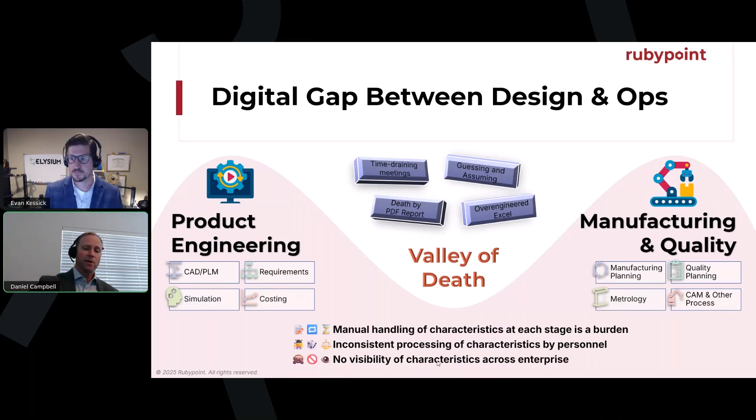And then another big problem, especially as we enter the digital age, is that there is no visibility to these characteristics, to those annotations on your drawing or your part, across the enterprise. It's sort of a visual artifact that gets consumed by a human engineer at different points of your enterprise. So this is the problem that model-based definition is trying to solve. And so that's why we talk about digital thread, model-based definition, characteristics. This is why people are starting to really talk a lot about characteristics, because people are realizing that really is the essence of the data that we're trying to track.

So to take a step back, what is the digital thread? It's a term that's thrown around. The core of the idea is that we have very, very good point technologies in narrow domains. There are very good software packages that do various things in each of these domains. The digital thread is about trying to connect all of these solutions so that they can talk to each other, so they can benefit from each other's knowledge. And that means across domains, from engineering through manufacturing through quality.

So what's the enabling technology for us to get there? Digital thread is just a high-level idea. You don't implement the digital thread exactly. So what are the technologies that you have to implement to get there? So MBD, that's really what we're talking about. We want model-based definitions so that we can have some semantic structure around our annotations, so it's not just a visual decoration for a human being to consume. So certainly semantic or machine-readable model-based definition.

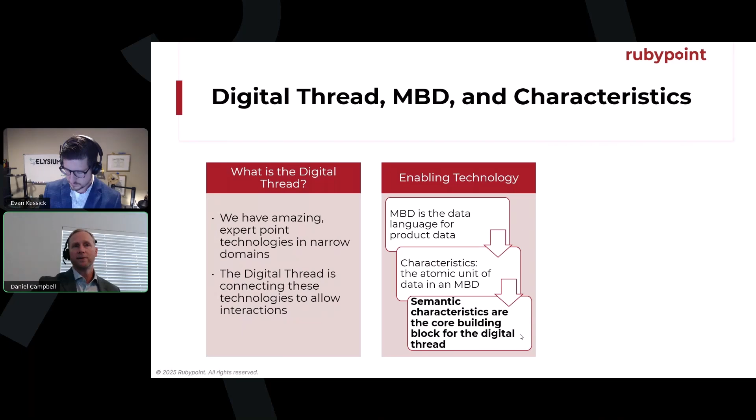So now we know what technologies we need to start taking seriously in order to implement this digital thread concept. And so how do we do that? The key is understanding that there are actually good technologies and good standards out there that allow us to implement these techniques. So don't think about this in the abstract. Look at use cases in your own enterprise where you consume characteristics, and think about how you can use the tools and standards out there to accomplish what you're looking for.

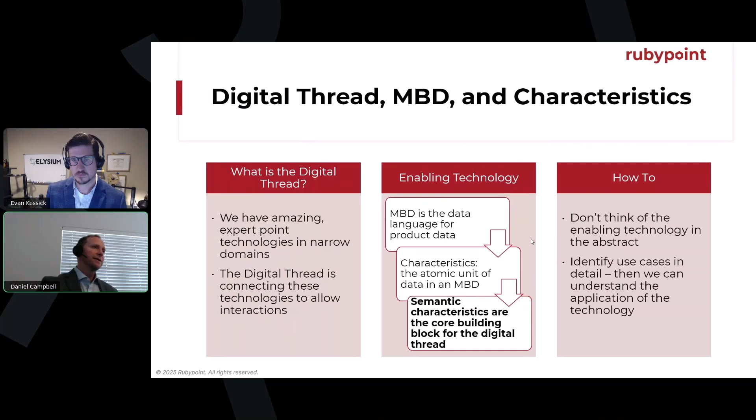That's a little bit of background on characteristics. I think it's a very important concept for people to really grab onto, which is why it's timely that the DMSC has released this standard, the first standard in this area, on model-based characteristics. What this standard accomplishes is it gives manufacturing enterprises a way of thinking about how to track characteristics, putting IDs on characteristics so they can be tracked across your enterprise, and, in addition to the characteristic itself, what additional metadata might be attached to the characteristic that should be tracked.

Basically what it does is it provides the framework where characteristics can start to be thought of as business objects across your enterprise. Something that could fit into a business software context, just like you might think right now about parts in terms of how you look at parts within the context of your PLM system.

And I think one thing to point out is that what this model-based characteristics standard is really meant to address is the idea of model-based definition, 3D annotated models. But actually the principles that are discussed here are applicable to traditional 2D drawings as well, if you want to start thinking about characteristics on 2D drawings in this way.

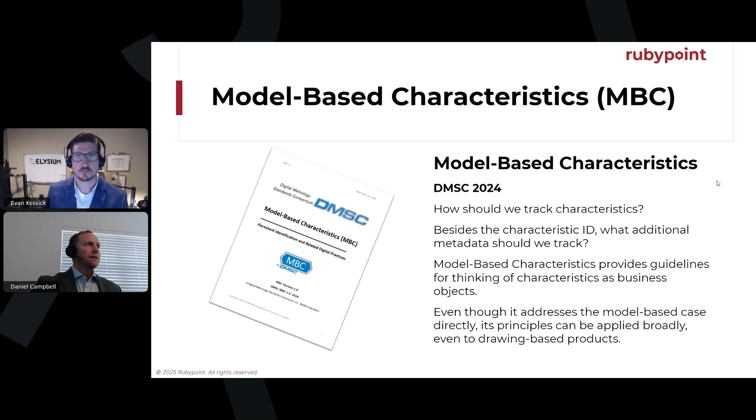So what I'm going to do is give a little bit of background about what the model-based characteristic standard is, and then give you the resources so you can go and download it yourself and check it out. So what we're talking about is this idea of these characteristic tags, these characteristic IDs. Sometimes they're known as balloons. Traditionally they're known as balloons because you take a piece of paper and actually start marking it up with a pen, 763, 764, 765, etc.

But what we're establishing is a framework by which we can start to identify what these characteristics are, how they get tagged, how they are discussed from one software to another. And so that's really one of the core ideas, the way that characteristic IDs are assigned. But then we get into different augmentations that could be added to the characteristics as well, and establishing a framework by which you could start to apply this extra bit of metadata.

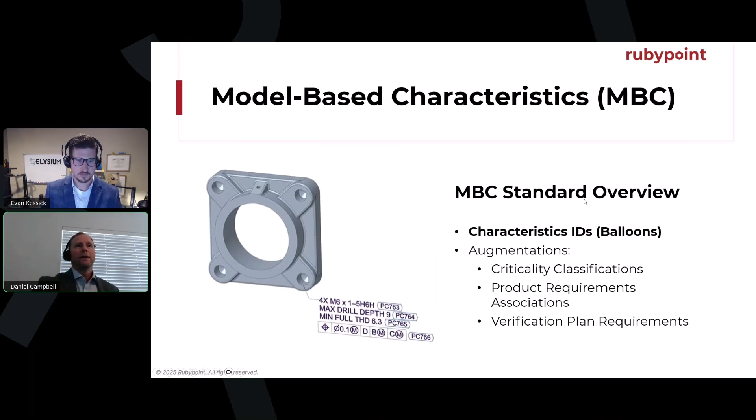And so, like I said, the core thing is this balloon, and this is called the product characteristic tag in this case. It has this PC prefix, which is optional, but it stands for product characteristic. And this is the core ID for tracking this characteristic. This might be a human readable characteristic, 41. That ID should be unique within the part. I think that's obviously very important.

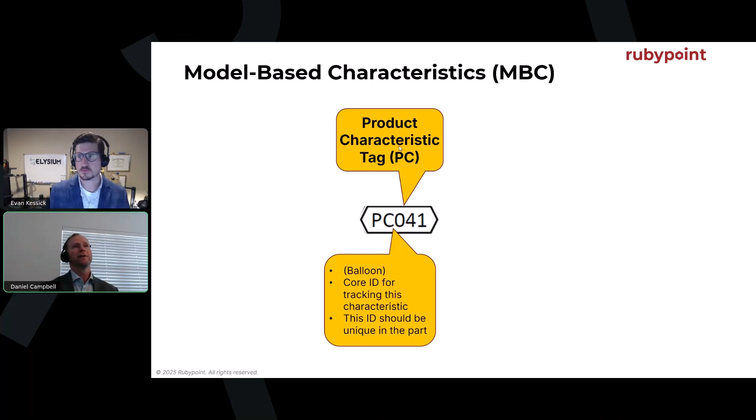Also, the standard does discuss the idea of the use of machine readable IDs. You may have heard of UUIDs, which is a very robust standard for generating unique IDs that can be assigned to a piece of data in software. So there's a framework for mapping UUIDs behind the product characteristic tag as well. But that's kind of the core element that keeps this entire characteristic tag together.

Next, we have the product requirement association. And so really what this is doing is tying together the product requirement that was the source of this particular annotation. So maybe this annotation is a size tolerance on a hole, and that exists because there's some critical design aspect of this part where that diameter needs to be controlled for the function of the part. That might be annotated somewhere in a requirement system.

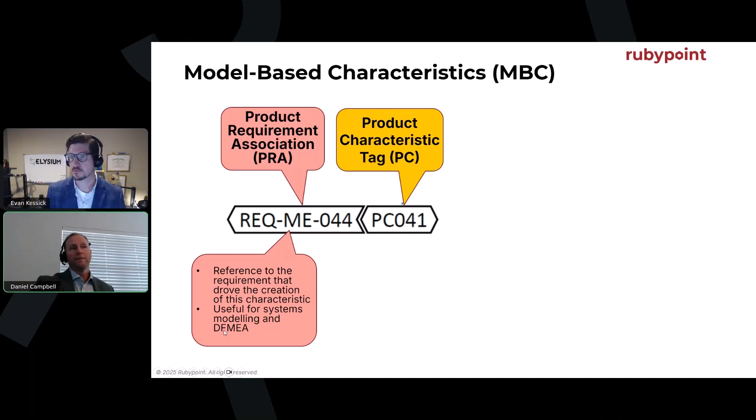This allows us to establish that link between the characteristic on a model-based definition and the system requirement that originally drove that characteristic. This could be useful, for example, for design FMEA analysis. It could be a very useful piece of data.

Next, we have this idea of criticalities. Generally you might see this as something that's high criticality or medium criticality or low criticality. This is a piece of extra data on top of a characteristic that could be added. There are a few different types. There are levels, like I said, high, medium, low, where it's an ordered set and you choose one.

There's also category, where it's an unordered set and you can choose one or more; maybe you could say this is for safety and for regulatory compliance, for example. And then additionally, there's this caveat, which is just free-form text that allows product definition to specify a little bit of extra information related to the criticality.

The final piece of metadata that could be attached is this verification plan requirement, which provides a method where we can say a little bit about the way that this particular characteristic should be inspected. That means, for example, you could specify a method like CMM or caliper, but also the context. You can specify, well, in FAI, we're going to inspect it with CMM, but once we go into production, we're going to use some other method.

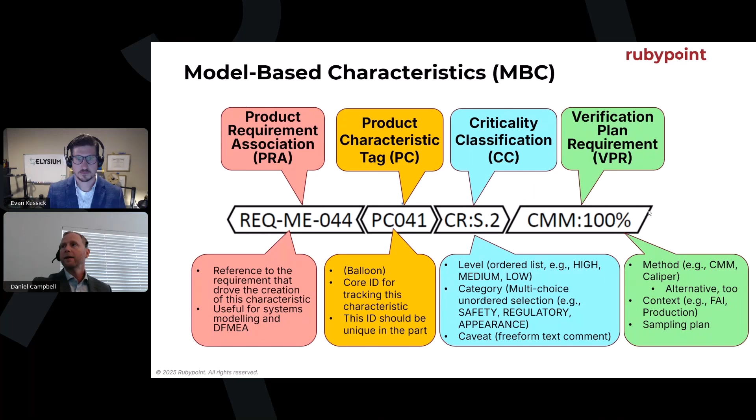The next standard area I want to talk about just briefly, especially in regard to how it ties to making the ideas in MBC a reality, is QIF, which is another DMSC standard. Again, you could find QIF version 3. You could download it from the website.

So QIF, this is a scene I think that many people have seen. These are the different application areas of QIF. At the core, we have the library, but then there's an application area for model-based definition, for plans like inspection plans, measurement resources, the ability to characterize what your measurement resources are, rules for establishing maybe best practices or templates that you might want to apply.

DMIS is not part of QIF, but it's very much harmonized with QIF. It's also governed by the DMSC, so it's included here. QIF results for collecting inspection data, and then QIF statistics for specifying statistical methods for analysis of the data and so forth. But at the core, again, we have this library.

This is really important from a model-based characteristics perspective for two reasons. That's features and characteristics. So this is a core part. If you want to understand what QIF's about, you should understand the way that it thinks of features and characteristics. That is at the heart of QIF. So what is a feature? A feature is a way of abstracting some portion of geometry, really for any particular reason that you might have.

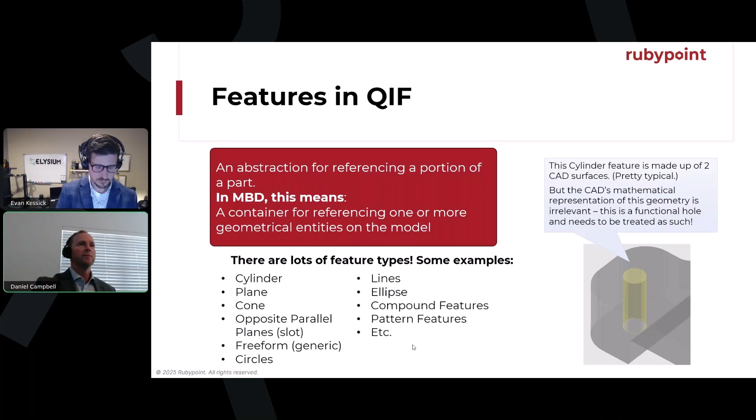And then the next idea is this characteristic. So this is how this idea of model-based characteristics is implemented in QIF. Again, there's a rich taxonomy of different types of characteristics in QIF. They might be tolerance, sort of GD&T related, maybe it's surface finish, welds, user-defined characteristics. And the core idea is that a characteristic on a part points to a feature, and then a feature points to its underlying CAD surfaces.

This right here is the essence of how QIF is architected from an MBD perspective. And this right here also is the essence of how model-based characteristics should be instantiated, and how the ideas of model-based characteristics are being instantiated, with this core concept right here. So that's a little bit of background about the general ideas of model-based characteristics and how they can be implemented in QIF. And Evan now is going to talk a little bit about some of the real application-specific areas and how these workflows look.

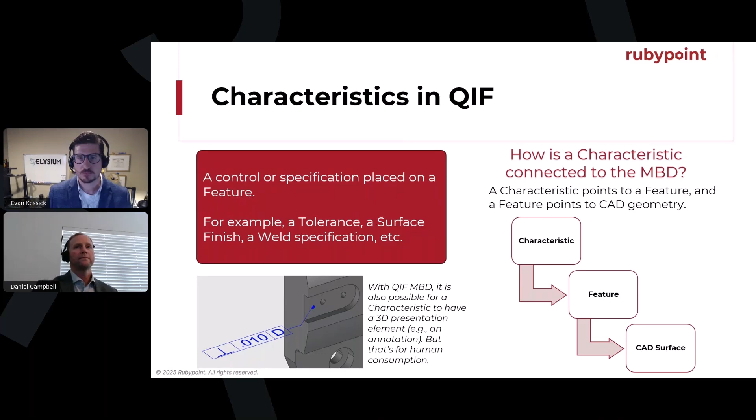Perfect. Thanks, Daniel. Let's see here. Share my screen. All right, you able to see my screen?

Okay. So next, we're going to talk about the enterprise. So Daniel did a great job of talking about model-based characteristics, QIF, and kind of some of the gaps that we have within the industry today. And we're going to walk a workflow. But before we get there, I want to talk about a couple of things, and that is enterprise technical data exchange that's occurring today within your enterprise.

And this is a look at a contrived model-based enterprise. It's made up of various different domains that represent lifecycle activities from concept to disposal. So we have domains like engineering, and then we have our consumption domains, which are made up of manufacturing, quality, sustainment, and an extended enterprise, which is your supply chain. The goal is using model-based definition within your engineering domain, or you may even be creating in-process models within manufacturing and sharing that downward as well.

The idea is that you want to exchange this data and all of the elements of model-based definition. But now what we're talking about is including and adding model-based characteristics and even all of the augmentations that Daniel was just talking about. So whether this data is being created within your engineering domain within the native CAD, or we're going to talk about where QIF can fit in to accept the data from your engineering domain, your native CAD, or even creating model-based characteristics through a QIF workflow, and then being set up to exchange this data to your downstream domain so you have persistent, traceable data throughout the product's lifecycle.

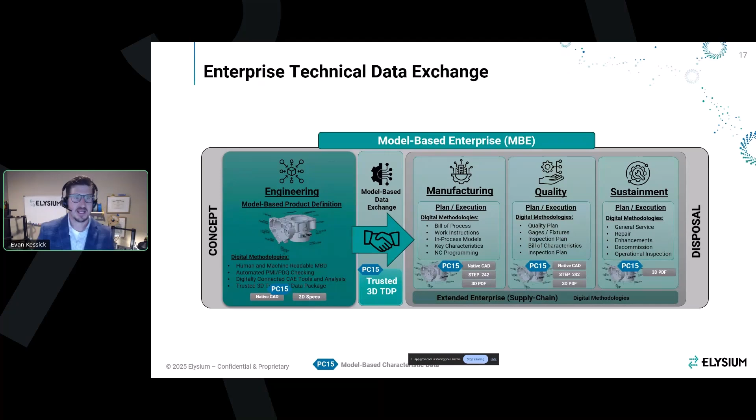Now, when we think about a technical data package, a 3D data package, this is a made-up definition being very closely coupled to standards. I feel that the standards within ASME and even Military Standard 31000 need to adapt. And I think that there's some key attributes that I want to talk about here for a data package, and that is that the data needs to be authorized. It needs to be trusted, validated. It needs to have complete definition across all of your product definition. It needs to be interoperable, traceable, and human readable for all of the consumption workflows within your enterprise.

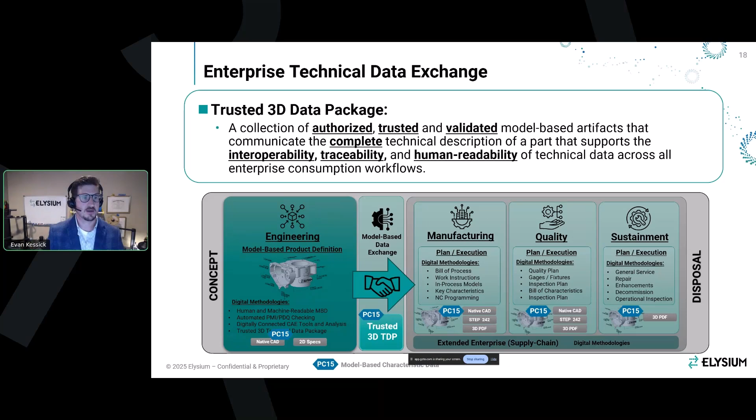And so what does it mean to be human readable, interoperable, trusted, and traceable? I don't want to talk about this in the context of all of model-based definition because that would take a long time. But let's talk about it in the context of model-based characteristics. And Daniel did a great job of teeing this up. We have two model-based characteristics or product characteristic tags. So I have a PC10 and a PC11.

What makes this data human readable? That is the graphical representation that I can see this tag. It's within close proximity to its requirement, my pattern, my feature of size dimension. And I can use my human brain to make that connection that PC tag 10 is associated to this pattern of 4 holes for the size tolerance.

But what about our downstream systems and tools? What makes it machine readable or interoperable? That's where we need some metadata or attribute structure or framework. And this is the gap that the model-based characteristics 1.0 standard is filling. Within that standard, it tells us that we need to have some attributes, some metadata that says what is the PC tag. So in this case, my PC tag is going to be PC10. Do I have a UUID? So what is my universally unique ID to make it stand on its own?

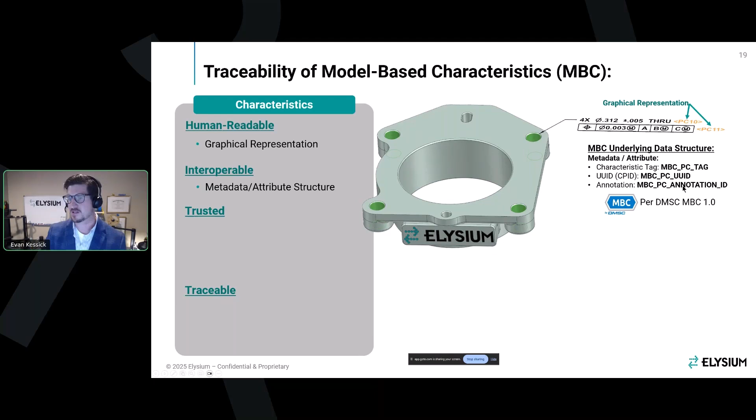I did see a question in the chat, and UUIDs today are an optional thing within the standard, but if you want data traceability and for your characteristic tags to stand on their own within your enterprise or within the universe, you need a UUID. And then what is my product characteristic tag associated to? In this case, it's associated to this annotation, and I would have that annotation named there.

What makes it trusted? It needs to be compliant to industry standards. It needs to be semantically complete. It needs to be universally unique with a UUID, and it needs to be verified through some type of checking process for it to be trusted data. And then data traceability happens as it's being consumed across our enterprise, as it's being consumed and reused within engineering, manufacturing, quality, and supply chain. We're all reusing this same data, the same product characteristic with the same UUID. It's persistent throughout the life cycle.

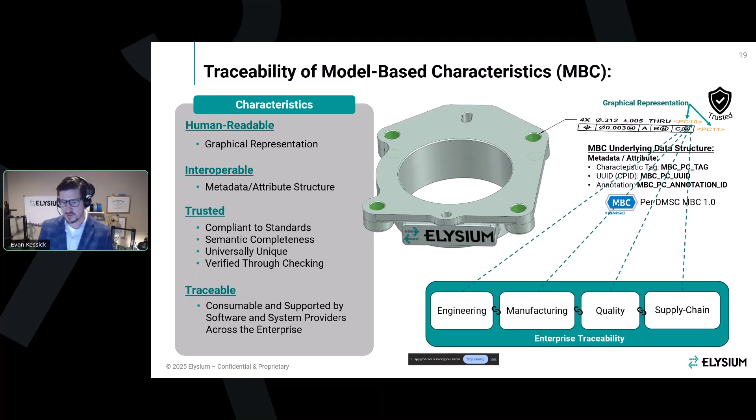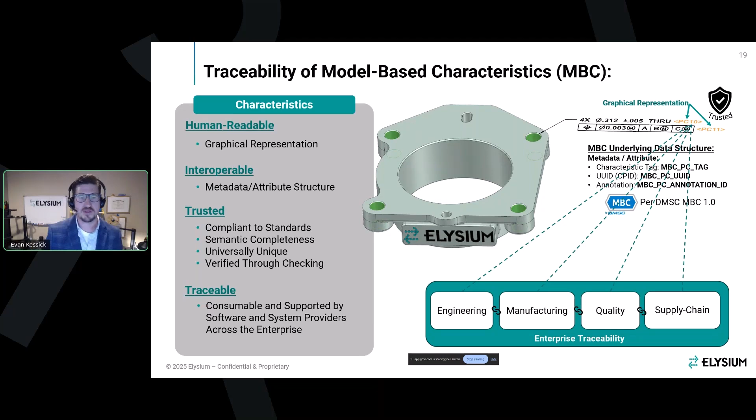And one of the things that Daniel said, which is really good, is that we now have data traceability at the atomic level, which is now at the characteristic level. If you stop to think about that, today we usually have data traceability at the part level, or maybe at a serialized part level. Now it's down to a characteristic within your part, a piece of PMI, and that's great.

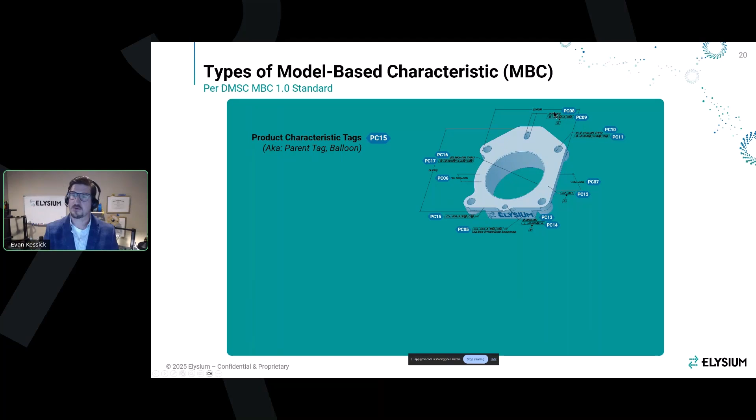There are two different types of model-based characteristics that I want to talk about. The first one is our product characteristic tag. That's the PC15 that you see on the screen here. I also like to call those our parent tags, or many of you call them balloons. And those are being assigned to each requirement or characteristic within our model, or MBD. You could think about this as being assigned to each requirement as it stands on its own, like for a size dimension and position tolerance.

But in some cases, for patterns, we also have a product characteristic instance tag, and these are the child tags or the child balloons, and these are the PC10, and then it has a dot with its instance. So for my pattern of 4 holes, I have 4 instances for both the size dimension and the position tolerance respectively.

All right, and once I've characterized my MBD properly down to the instance, I can now generate a bill of characteristics, which has a lot of great information embedded inside of it. I have all of my product characteristic tags. I have the presentation state that it resides in. I have its requirement as it's stated within my model-based definition. And then I have it broken down by nominal, plus minus tolerance, and even my datum reference frame if I wanted to filter or sort by the various different setups that I may have.

The nice thing about a bill of characteristics view is that A, it's characterized, and you can see a lot of your requirements all at once. And I think one of the hurdles that individuals face when transitioning from drawing-centric workflows to model-based is that you only get to see one presentation state at a time. In a 2D drawing, you may be able to see multiple views at a time. But in a bill of characteristics table, you get to see a lot of information across the entire table.

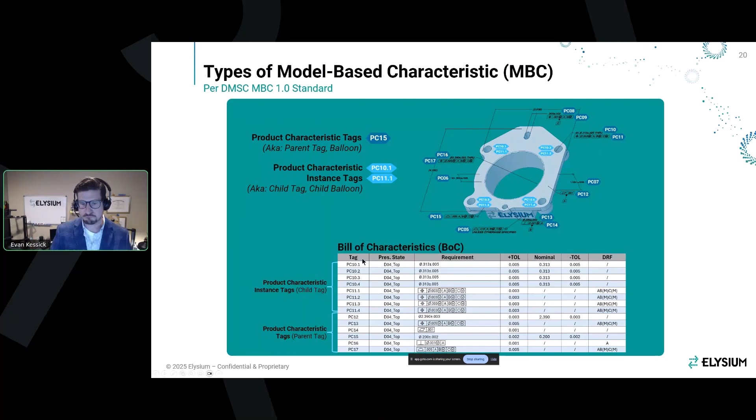So traditionally, right, in a drawing-based workflow, how are characteristics assigned? Where are they created? In a drawing-centric or drawing-based workflow, engineering creates a 2D drawing. That's usually accompanied by a 3D model. And as that data gets released, some data may be exchanged into a PLM, but quality is going to manually balloon or characterize this 2D drawing. Keyword is manually. And then once it's characterized, they'll manually generate a bill of characteristics, whether they manually transcribe that into an Excel spreadsheet or into some database downstream to perform lifecycle work activities.

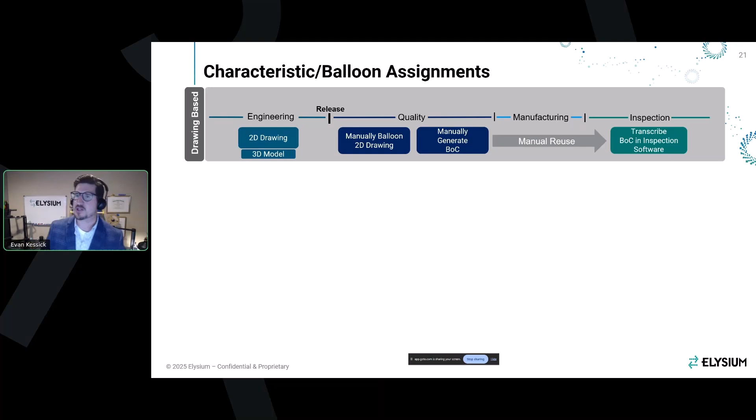Manufacturing will manually reuse this, and then inspection, it gets manually transcribed into their inspection software. So if you think about where characteristics are actually being assigned, it's by a human in the quality domain downstream, out past release, which is very error prone and time consuming. In some cases, an alternate option would be that those characteristics are being assigned within the inspection domain.

If we look at a model-based workflow, I have two of them that I want to show you, where today we want to characterize our data within engineering. And I put partial characteristics here because there are some shortcomings and hurdles with the current state of tools to characterize our product definition within our native CAD. And then complete characterization is happening within this enterprise data workflow that we'll talk about here in a few minutes.

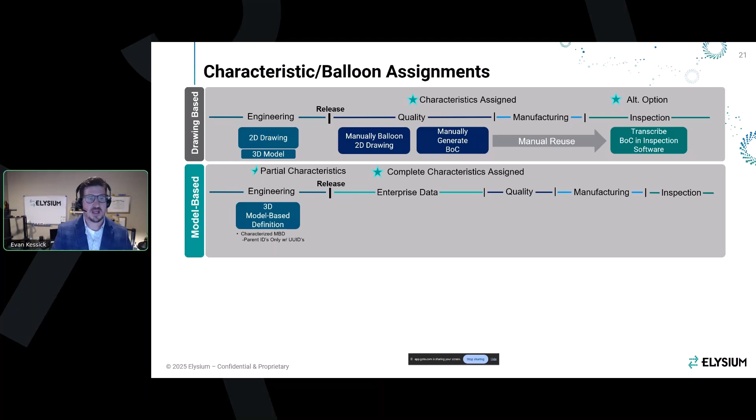So we have our model-based definition where we're characterizing our MBD, but only at a parent level, okay? So that's going to be that product characteristic tag level. Through an enterprise data workflow, we'll generate QIF where we'll reuse that parent tag within the native CAD, so extending that thread across, including the parent ID tag. But we'll assign those instances. Okay, so we'll decompose that down into the instance level, assign those UUIDs for instances, and then generate the bill of characteristics in addition to a visual data package.

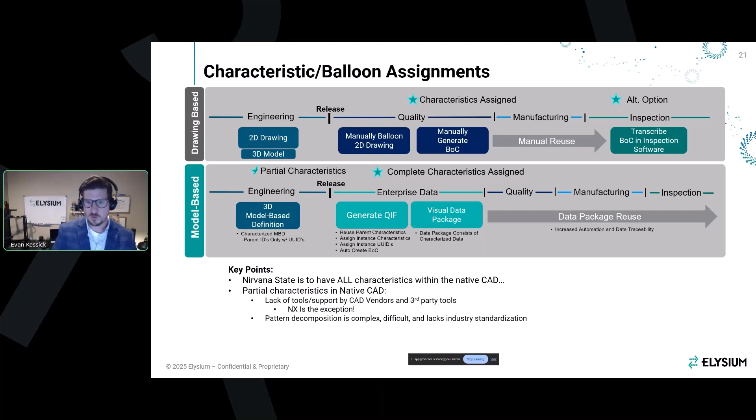From there, now we're setting up our consumption domains for the ability to reuse this data, right, for automation, data traceability. But obviously, I want to make note here, our nirvana state is that we want all of our characteristics up front in engineering. But there's some significant hurdles. And I think that model-based characteristics is fairly new to the industry. To be able to characterize and decompose patterns is a challenging thing. And one of the things I'm working on within the ASME standards committees right now is that decomposition of these patterns, so we can help support these types of workflows.

And then the next one is where we're not authoring any characteristics within our native CAD, where this characterization is happening within our enterprise data workflow. And that is an acceptable approach. I think it's more of an interim approach until these tools are more mature to characterize our data within our native CAD. So you can see that I have uncharacterized data within my model-based definition. And then I'm assigning both parent and instance tags within our QIF workflow, and then we're exchanging that data downstream.

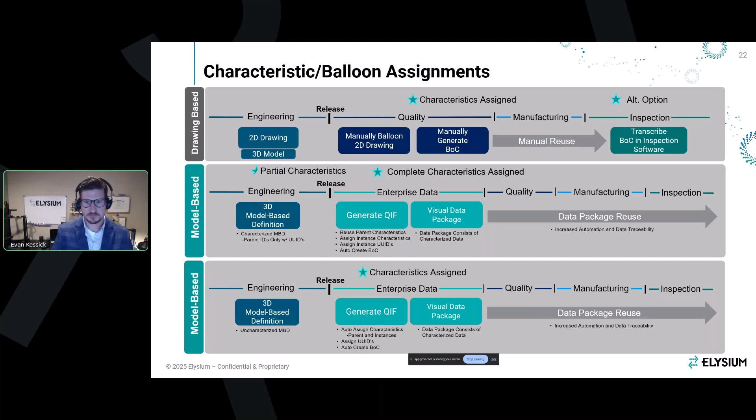Here's a closer look at that. So here's the partial characteristic. So here's what it would look like with the PC tags in our native CAD with our metadata structure that accompanies that, right? So this is my human readable portion, and then I have that metadata structure to ensure that the machines and tools downstream can also have that same.

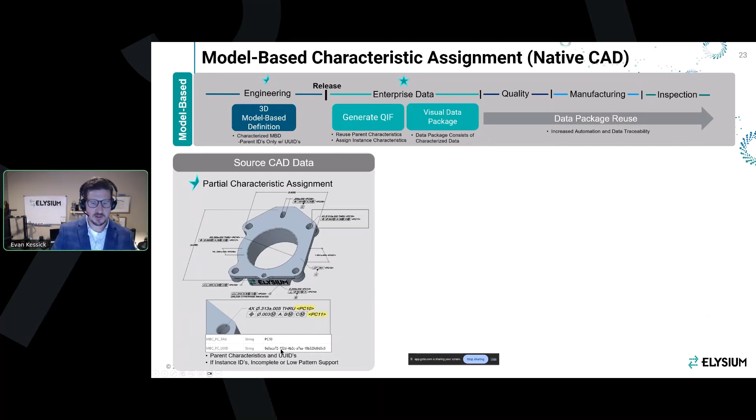But when we translate this to QIF, right, we're going to harvest that geometry. We're going to harvest all of the PMI and its attributes and metadata. We're going to reuse and harvest the parent characteristic tags, but then we will augment and we will assign those instance tags because that's not there. Once we generate the bill of characteristics, we now have that complete characteristic assignment that's happening within our QIF workflow.

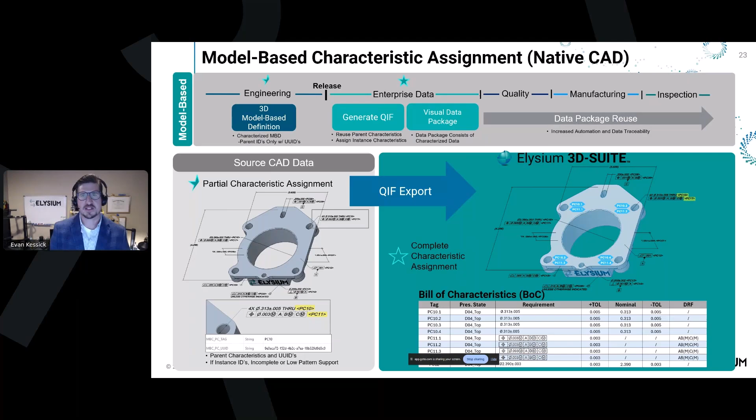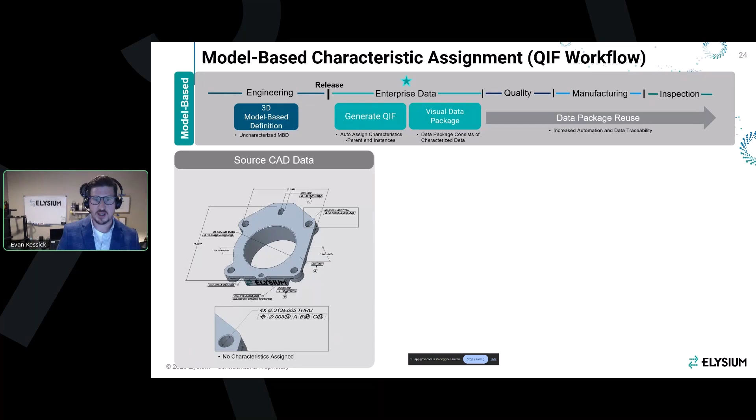The difference here in the next one is all of it's happening within our QIF workflow. And this is something that can be done today. QIF is a very mature tool. QIF MBD has been around for quite some time. And once you export that QIF, you're going to harvest the geometry, all of your PMI and attributes, but now we can assign those parent tags and then also all of our instance tags to generate that bill of characteristics.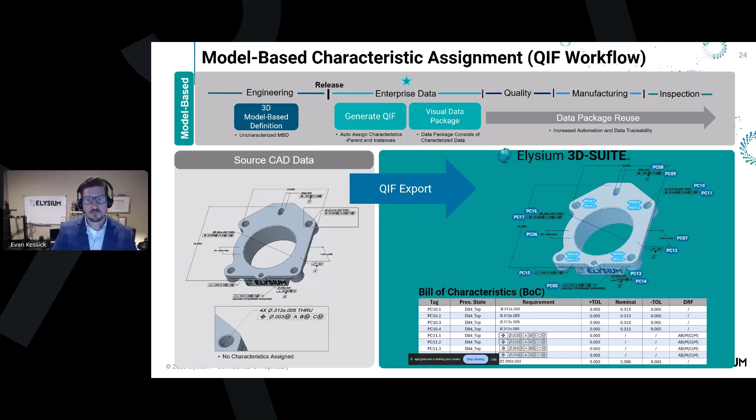All right, so let's take a look at a workflow. So next, we're going to actually walk this workflow. So I'm going to showcase the only CAD tool that has the ability to characterize your native CAD, which is NX. And they do a really good job of characterizing that data. So if any of you happen to be using NX, get yourselves a version of 2506, and you'll be able to characterize your data. So we'll take a look at that.

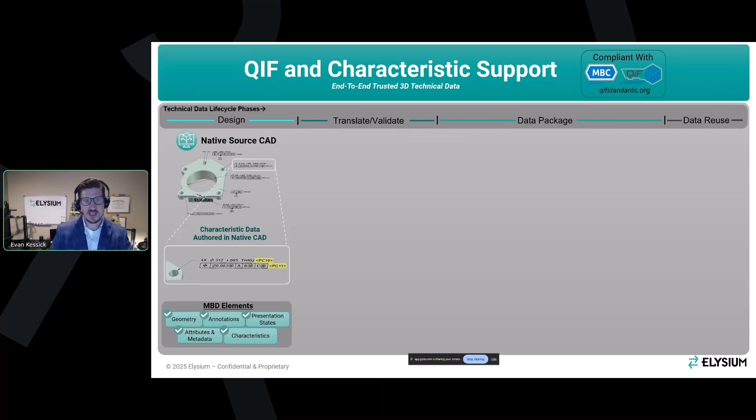We'll then show a QIF workflow and how that's being extended from your native CAD into QIF. We'll take a look at a visual technical data package that showcases these characteristics, showcases the bill of characteristics, and allows you to visualize that data, that would be the human readable portion, and then the ability to attach your interoperable data sets like QIF and STEP 242 to this technical data package to then extend to your downstream consumption domains.

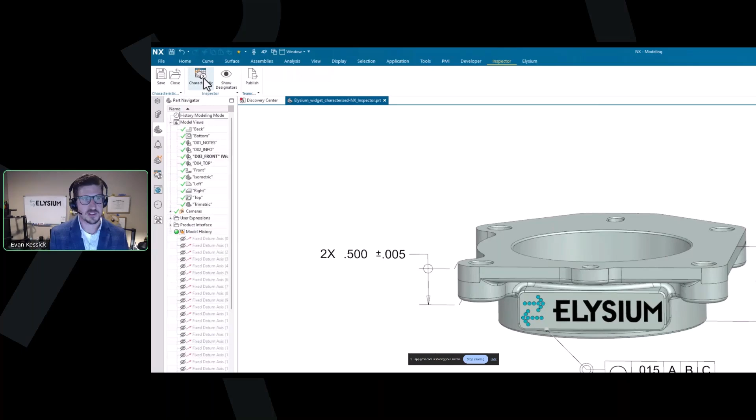So within NX, we have NX Inspector. Directly within NX, there's a ribbon called Inspector where you have the ability to generate characteristics. You can show those characteristics, turn them on and off, and you can publish them directly to Teamcenter, which is great. Characterizing your data is really easy. You can start your indexing. So I'll start at 1, and then I'm going to select all the PMI within this view, and then I'm going to hit Apply. So characteristics are off by default. I'll show you that here in the next view.

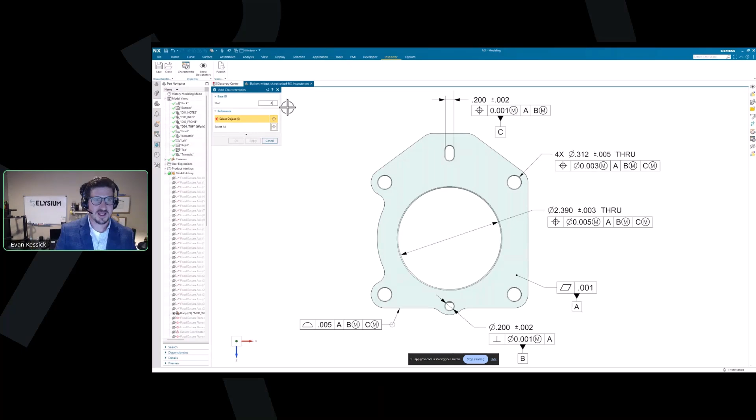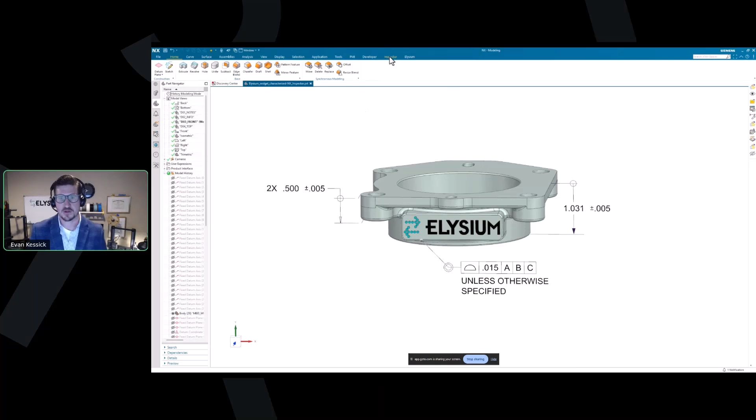So I'm going to go ahead and characterize again, make sure my index is correct. I'll select all of the PMI within this view, and then I'll hit Apply. We can visualize these characteristic tags. So there it is. We have our PC tags in the text-based symbology that the model-based characteristic standard allows. And there is a characteristic navigator that I don't show in this video, but I do have a slide next that I'll show you, where you can see that for this PC tag 10, I have my characteristic navigator.

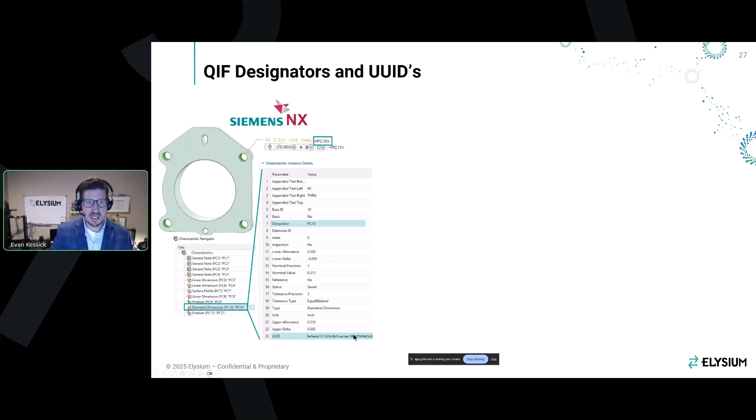And in the latest version of NX Inspector, you have the ability to do instance tagging as well. But there are some limitations with that, depending on modeling practices and using the hole callout tool. But here's a look at that. So in the characteristic navigator, we have our PC tag 10, our UUID that's being assigned. And then as we export that to QIF, you can see that that data is being harvested and reused. So we have our designator, which is the PC tag, the parent tag, the UUID.

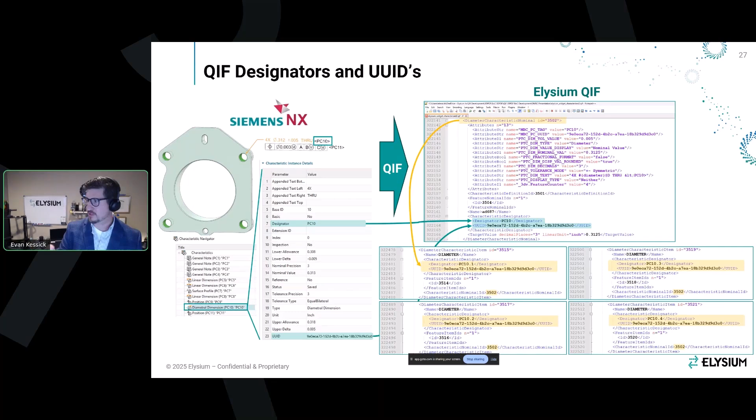And then this is being decomposed into instances within the QIF workflow. So here I have my PC tag 10.1, 2, 3, and 4. And you can see kind of how the digital thread is being extended from our native CAD beyond the normal geometry and PMI. We're now taking characteristics into our QIF format. And now that's giving us the ability to do that traceability at that atomic level.

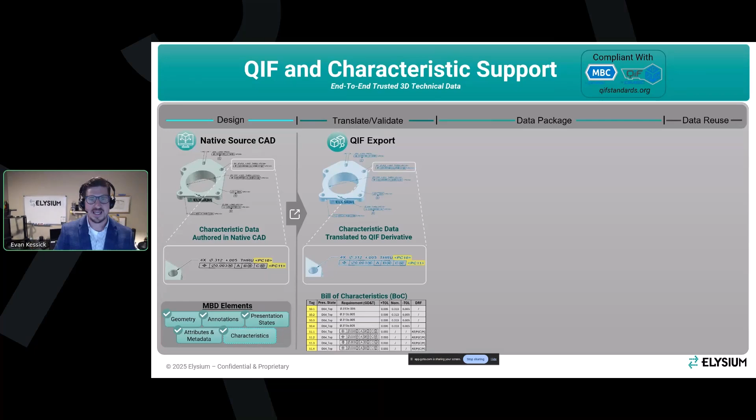Next, we'll generate a QIF. That's really difficult to show. It's kind of boring. But what we can see and visualize is the validation of QIF, right? So here is a validation report. It's using NX, and then we have QIF. I have access to all of my MBD elements, but what we're after today is just to showcase those PC tag elements and metadata making its way across, right?

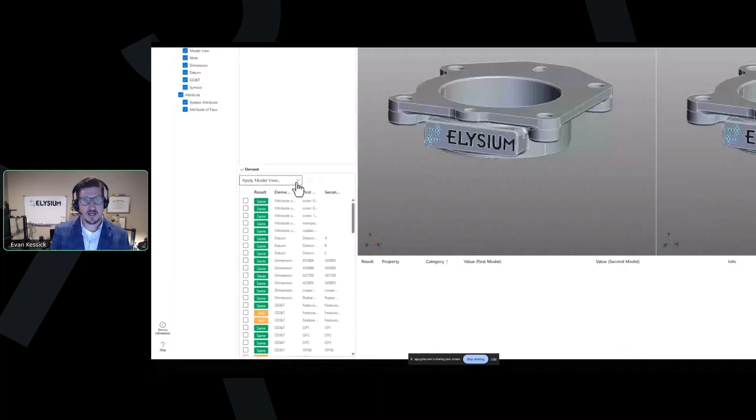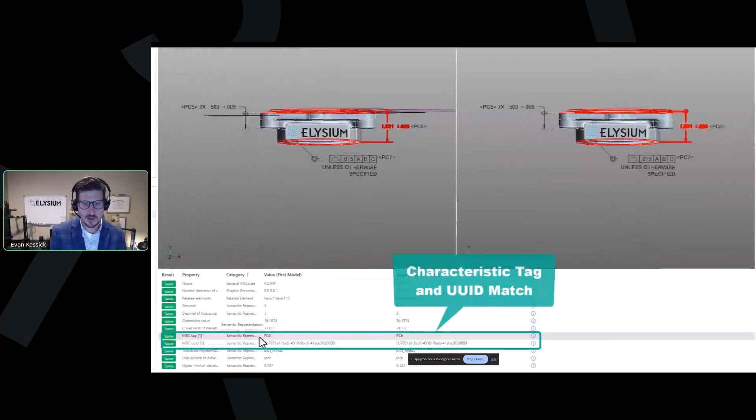So I have access to my views, and I'm going to activate all of the PMI, and then I'm going to select a specific annotation. And then you can see here that in NX, I have a PC tag 6 with a UUID, and that was translated across into our QIF. So you'll be able to validate that this data is persistent across. So I won't spend any more time on that one.

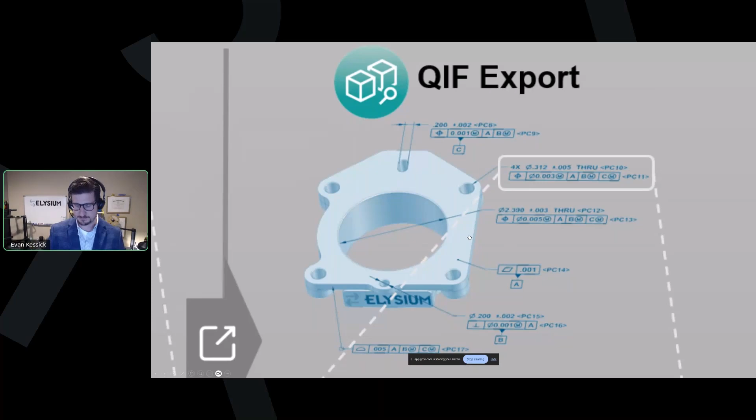Next, we'll take a look at a data package. And again, this is a visual data package. It's using a 3D PDF. There's also technology with using HTML, but this is the piece of it that is the human readable piece, but also we're containing those interoperable formats like QIF, STEP 242. You can even extend or attach native CAD and 2D specifications, whatever is needed for your data package.

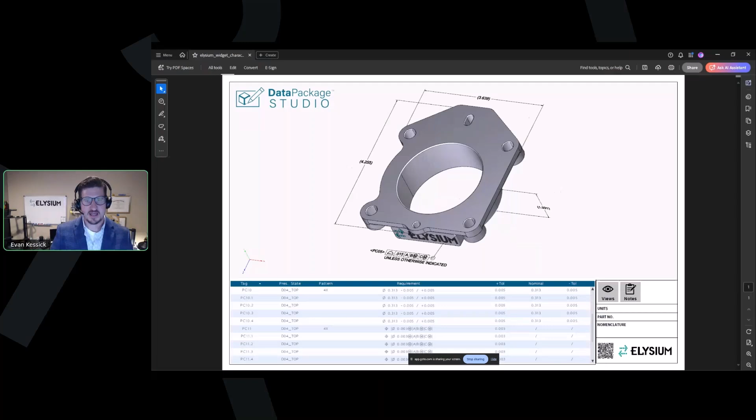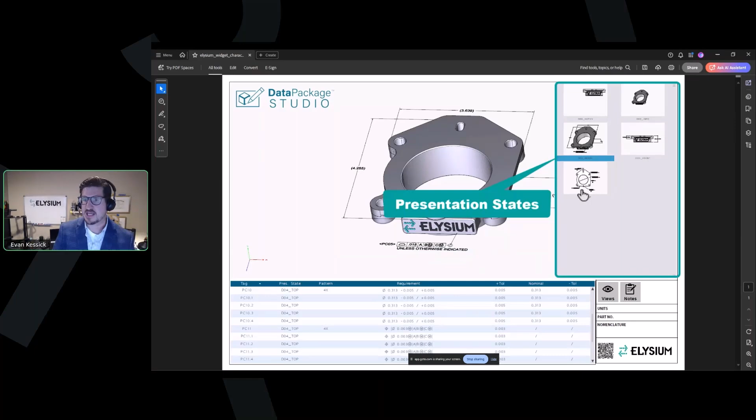So here's a look at that 3D PDF. So again, it's human viewable. You can rotate the model. You have access to all of your annotations. We have our bill of characteristics, access to all of the presentation states within the MBD model.

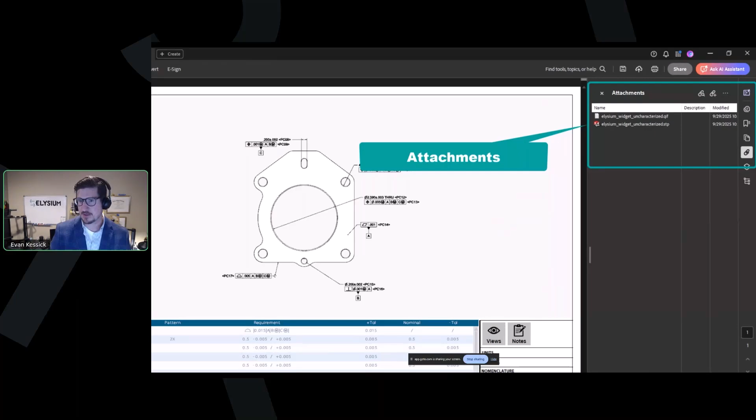There's access to notes. In this case, our notes are characterized and they show up here on the screen with those characteristics. And then we have our attachments for that, extending that for the machine readability portion of this. So all of our attachments can be downloaded. And then we have our bill of characteristics.

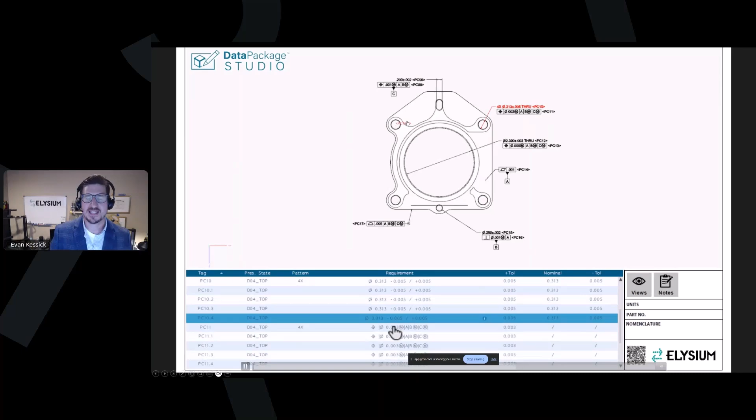So here I actually have the parent. So you can see that it has a pattern of 4x. You can see that here, all of its associations. And then it might be a little difficult to see, I should have zoomed in more, but I have my instance. So you can see my PC tag 10.1 and this one's 10.2. You can see those tags highlight and show you what that tag is actually associated to. You can rotate that model to see those associations a little bit better.

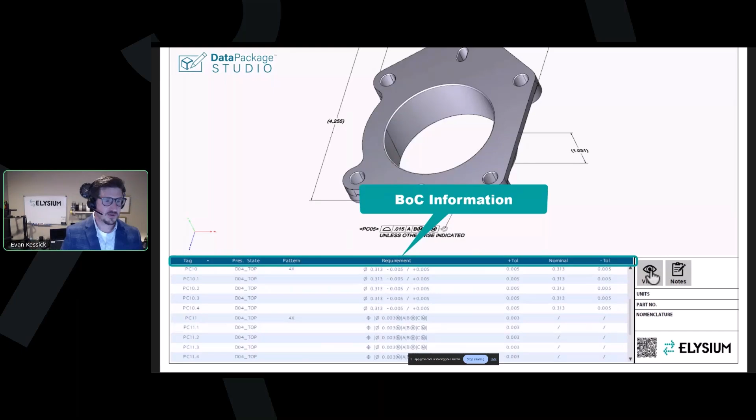But think about the old way of doing it. Now we've just created characteristics tags automatically, and now we're able to visualize those through a 3D viewable, which is great. In addition to having access to all of our bill of characteristic information, you can sort this information. You have access to your PC tags, the views, and then all of the requirements.

Why? Why would we want something like this? My past background is in engineering. I've been a releasing engineer in the appliance industry for the majority of my career. The latter half of that career, I was doing model-based. And I think the struggle is that there's a distinct boundary or silo at many organizations where data is being created and you just hand it over the wall.

And I think that there's some great use cases around a bill of characteristics style view that uses model-based characteristics that's being derived from our QIF. And the first one is that it's human readable. The humans in our model-based enterprise are a big part of our enterprise and always will be. So I can visualize the bill of characteristics table, and I can visualize my characterized PMI.

If that's not enough, you can ensure that your PMI is being decomposed properly, that your PMI is characterized properly through the viewable. And I think that this is a big one, that as you're reusing your QIF in downstream tools like metrology, you can ensure that it was imported properly.

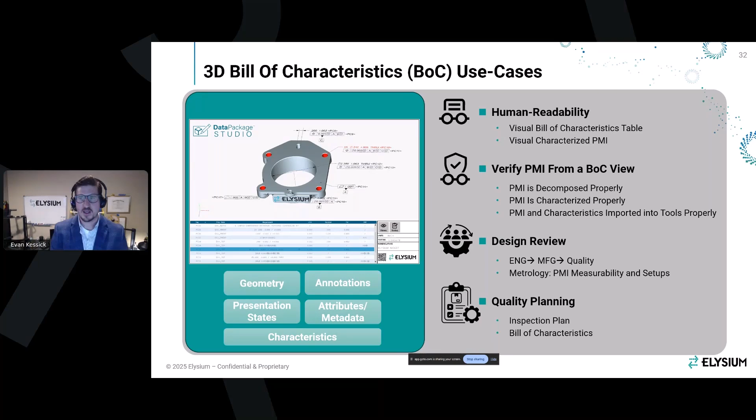And then the next thing is, let's reuse this data, right? Let's reuse this data within our downstream consumption domains. And I'm going to view this through the lens of inspection. I think that's one of the most mature workflows for reusing QIF. And we're going to show how we've extended from our native CAD into inspection through the use of QIF and our data package.

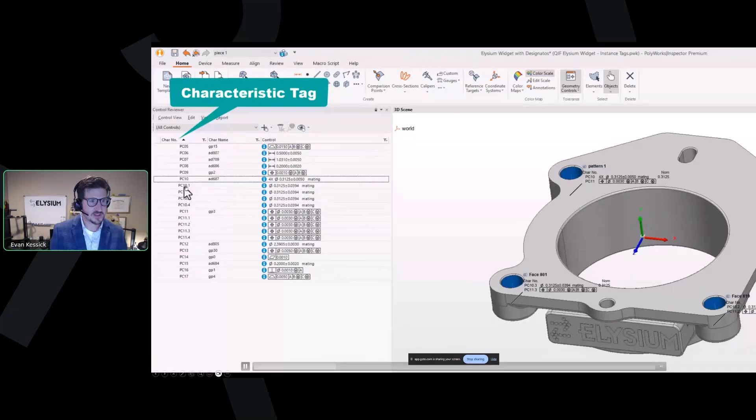So this is a look at PolyWorks Inspector. They have a QIF import, and many other metrology platforms also support QIF, and I have a list that I'll show you in a few minutes. I'm going to import my QIF, and it's going to import all of my geometry and all of my MBD elements, including characteristics. So I have access to all of my characteristic tags, both parent and child characteristics, or those instances. I have the characteristic name and their requirements.

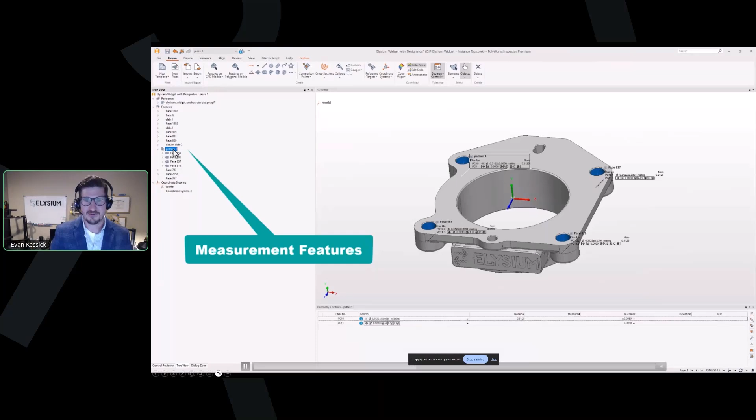I have access to my presentation states. And again, all this happened during that import process. There's no manual transcription that's happening here. There may be some corrections. And then I have my measurement features. What are we actually measuring? For this pattern of 4 holes, I'm measuring 4 cylinders. What are the requirements for each cylinder? Well, I have that here with my instances. So you can see the PC tags are actually associated to each hole.

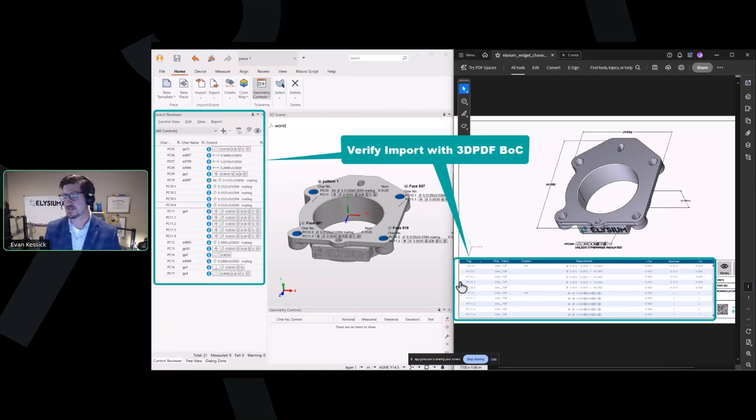Here's a good look of where the viewable can be used to verify, right? During any import process, there's a translation that's happening. Doesn't matter what derivative you're using or native CAD, there's a translation that's happening. And it's always good to verify that as you're importing your data into another tool. And I think the human viewable, this 3D PDF that's derived from QIF with the bill of characteristics, makes that really easy for you so you can visualize those instance tags.

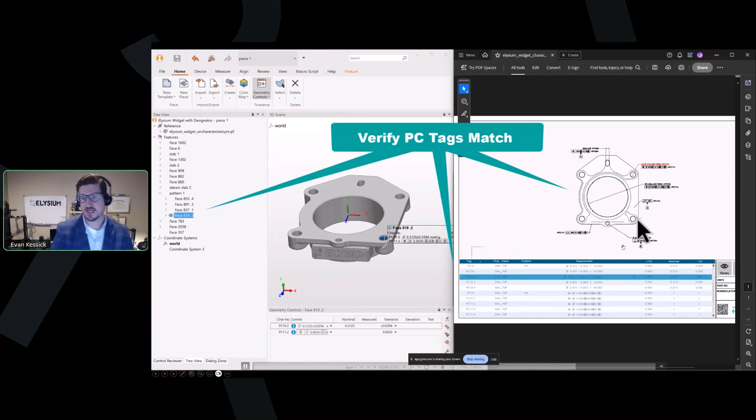So there's many platforms that support QIF, that support characteristics. And so if you work with some of these, I encourage you to have a conversation with them around QIF. Do a pilot. QIF is very mature, especially now that there's tools out there to author characteristics within your native CAD, third-party tools, and a few native CAD. And you can see how that data can be extended across.

So Polyworks Inspector, Metrologic, PC-DMIS by Hexagon, Calypso, Evolve SmartProfile by Kotem, Verisurf, and I'm sure there's others that I did not capture here.

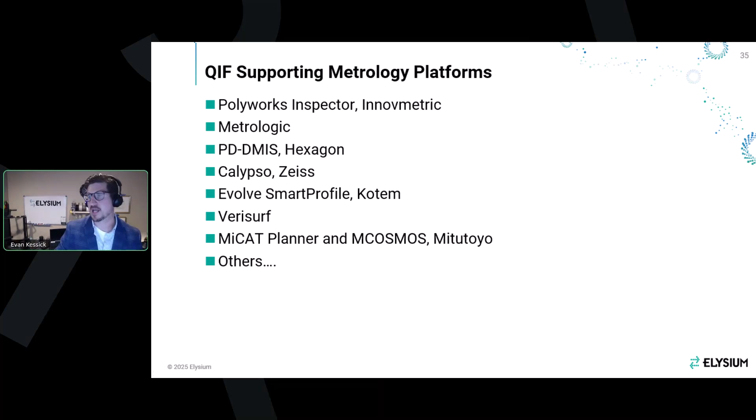So here, you can see how we've extended that digital thread. Using model-based characteristics that were authored within your native CAD, those were augmented within a QIF workflow, verified into a data package to extend that data to my downstream consumption domains for both the human and interoperability piece, and then consumed within one of my quality workflows for inspection.

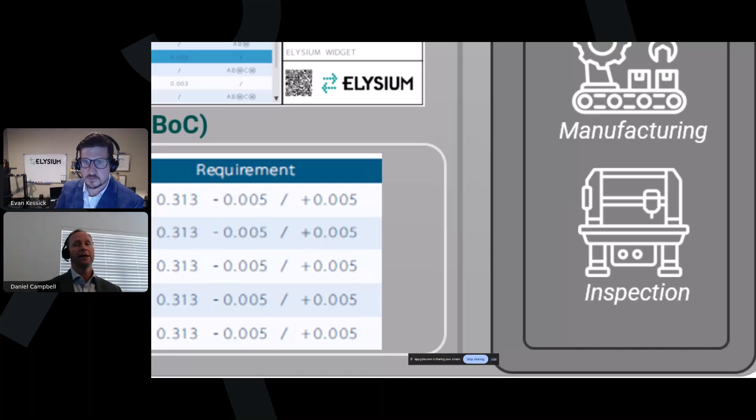Yeah, so here's a question, and actually there were a couple questions along this line. In one of the slides, there was a picture of a characteristic that had all around, or all over or something like that. And so the question is, is that information included in the characteristic? So the answer is it depends on which level you're talking about. So is that a part of what's talked about in model-based characteristics?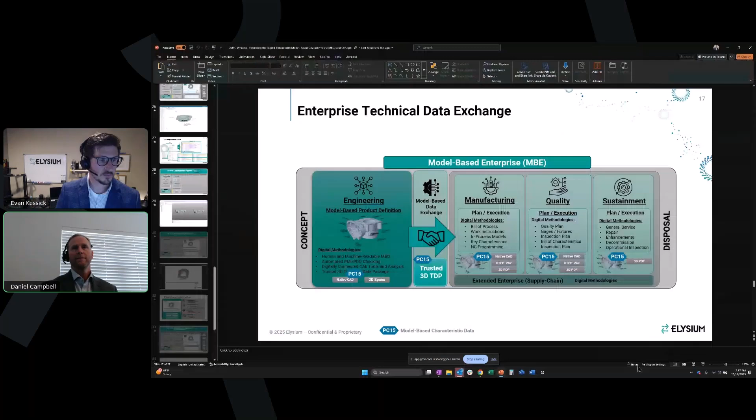Not exactly. Model-based characteristics is more about tracking the characteristics. But whether that's included in QIF, absolutely. There's a semantic understanding that this is an all around or an all over. And so in terms of these DMSC standards, this speaks to the relationship between MBC and QIF, which is that MBC is more about principles for managing characteristics, and QIF is really a data format.

Maybe we can get to one more. There's a question here from Ben. It might be more detailed than you'd be ready to answer here, Evan. But do you happen to know how characteristics from NX, for example, are manifested in STEP AP242? Oh, I don't have a good answer for that. We should be asking Ben that question.

But I think that the industry is working on that right now. Correct me if I'm wrong, but I think the concept of characteristics is not there within STEP today. As a custom attribute, can that data be authored into STEP? Yes, but to do what? You're right. What tool downstream is going to be ready to read that? So, I don't know. I don't have a good answer for that. I think that the concept of characteristics and the concepts of features and UUIDs and all of that is needed across all of our neutral formats.